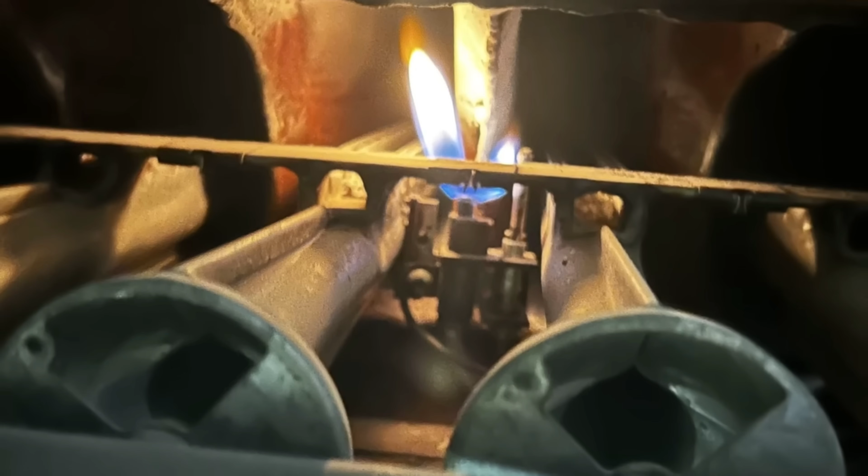Every winter, the same frustration returns. The heating bill rises, the furnace runs all night, and the house still feels cold by morning. In Newfoundland, a man named Eddie Roberts decided to challenge that cycle with a solution that cost less than $50.

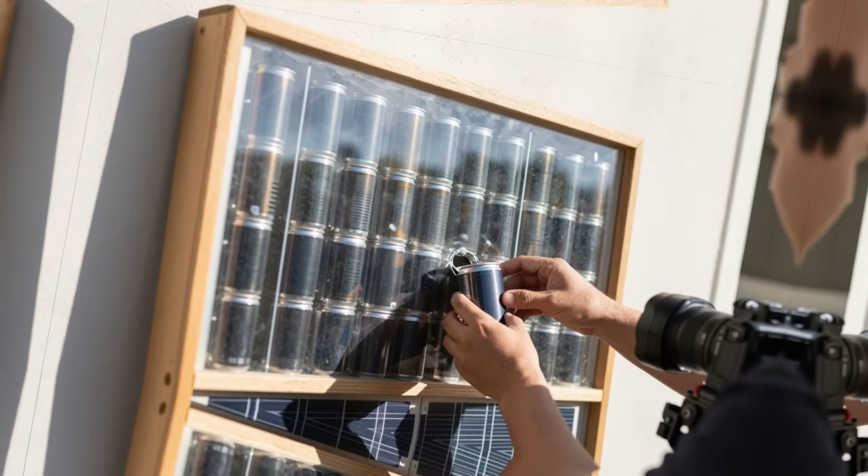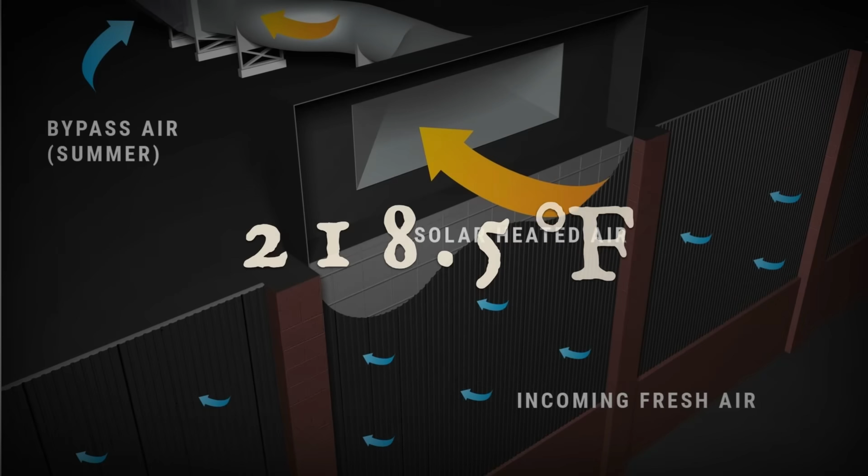Instead of relying on expensive equipment, he gathered 256 used aluminum beer cans, painted them flat black, arranged them in vertical columns inside a wooden frame, sealed the front with glass, and installed the unit on a south-facing wall. Then he measured the results. On a cold winter morning, the air entering the collector was 60 degrees Fahrenheit, but the air coming out reached 218.5 degrees. No electricity, no motor, no complicated machinery, and no monthly bill.

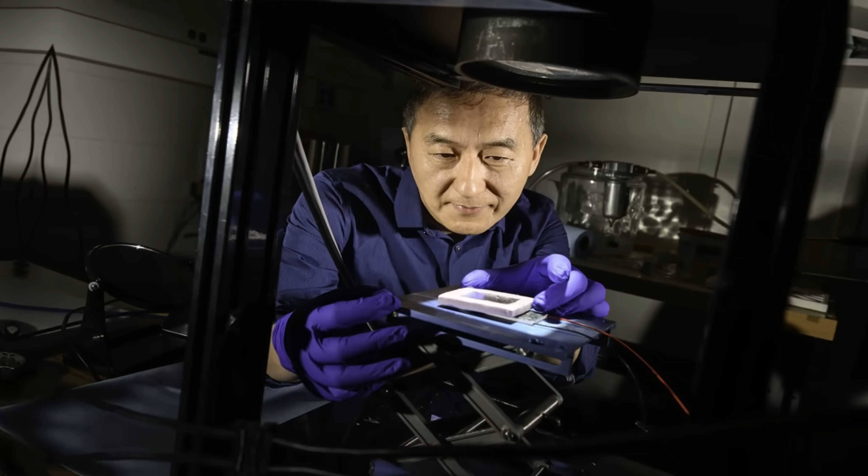It sounds unbelievable at first, but the real surprise is not that it worked. The surprise is that so few people know about it.

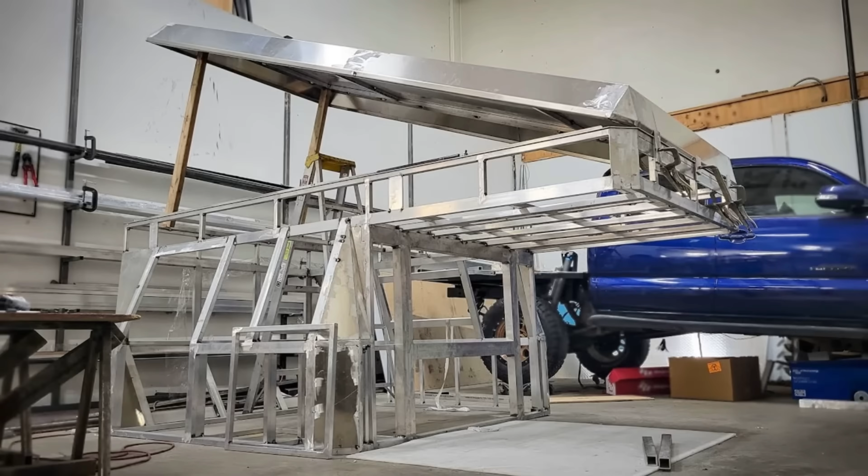Eddie Roberts was not alone. In the snow belt near Lake Michigan, another builder named Guy Sperry created his own solar air heater using 240 aluminum cans, a sheet of glazing, steel backing, and an aluminum frame. He built it himself over a single weekend.

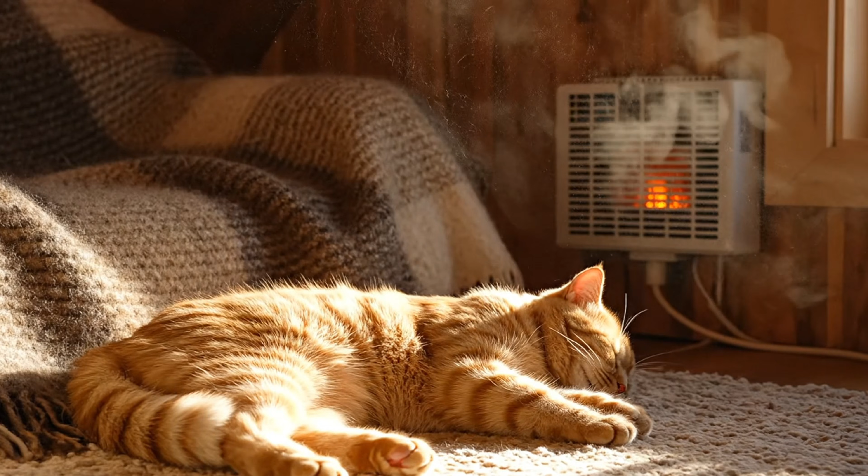Then winter arrived. On one of the coldest days of the year, with the outside temperature near 4 degrees Fahrenheit and icy wind sweeping across the lake, Sperry checked the temperature inside the collector. It had climbed to 172 degrees. His furnace did not run once that day, yet his small house stayed warm.

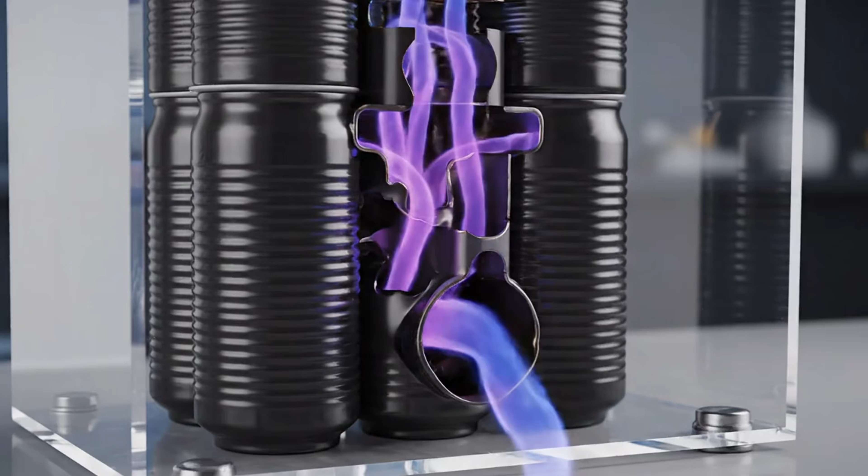This was not luck, and it was not fantasy. It was sunlight, recycled metal, and physics working together in plain sight. You can ignore a strange invention, but you cannot argue with measured heat. That is where this investigation truly begins today.

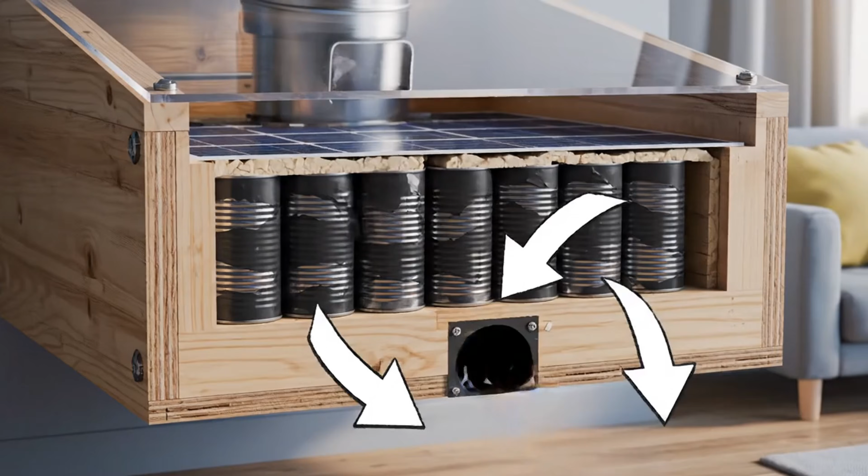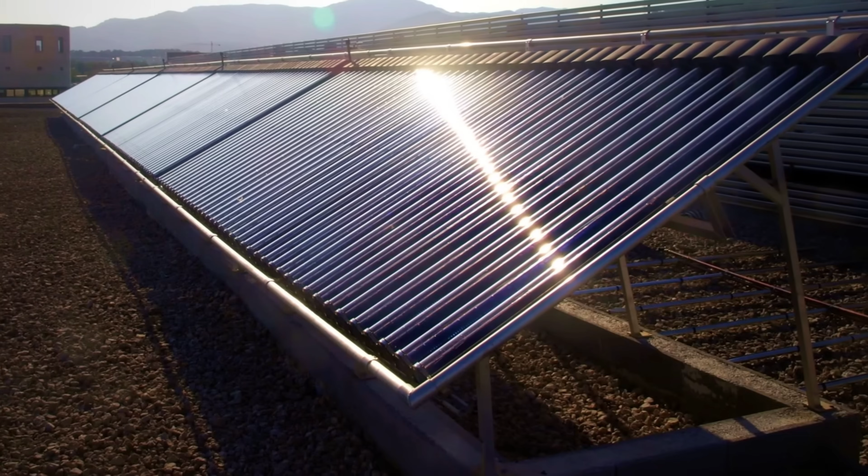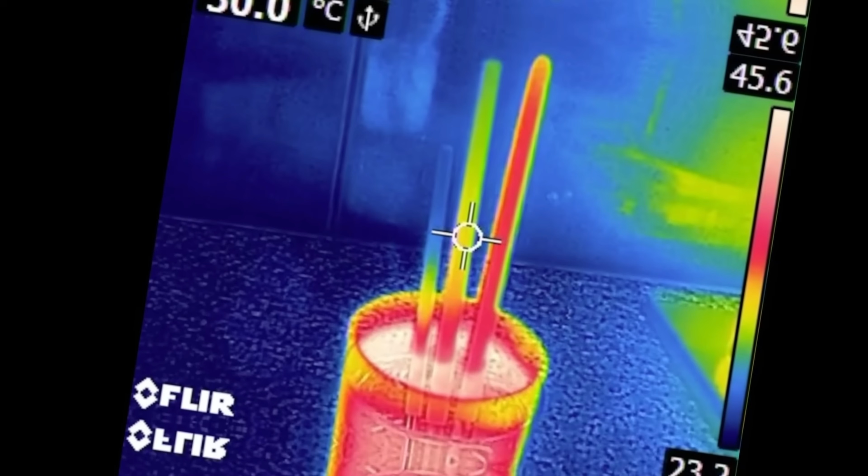So how can a simple box filled with painted aluminum cans produce that much heat? The answer is thermosiphon physics, a natural convection cycle that works without fans or electricity. Sunlight passes through the clear front glazing and strikes the black painted aluminum surface inside. Because black surfaces absorb radiation efficiently, the cans heat up quickly. Aluminum also transfers heat extremely fast, much faster than many other common building materials, so the warmth spreads through the can columns almost immediately.

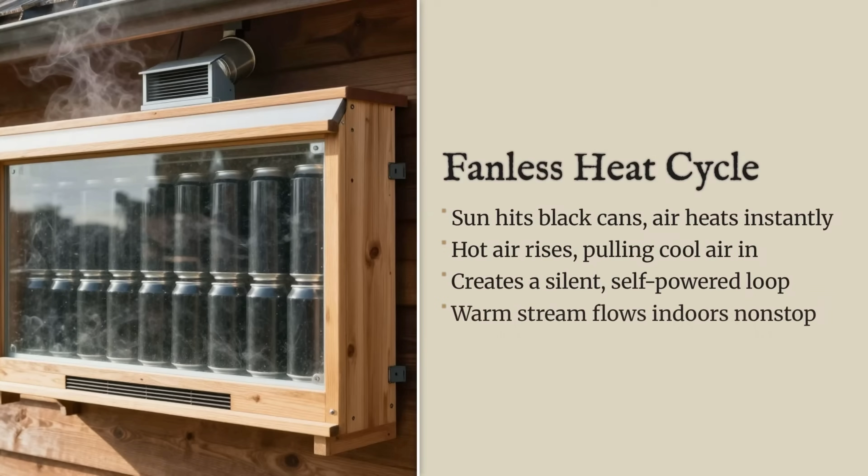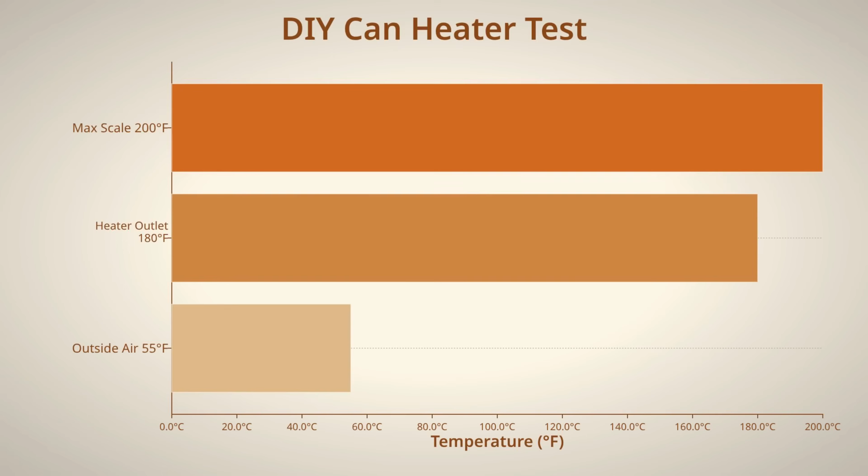As the air inside those columns heats up, it becomes lighter and begins to rise. That rising hot air exits through the top vent and flows into the room. At the same time, cooler and denser air from inside the house is drawn into the lower vent to replace it. Then the cycle repeats again and again as long as sunlight remains strong. In other words, the sun creates a continuous loop of moving warm air, turning discarded cans into a silent heater powered entirely by daylight.

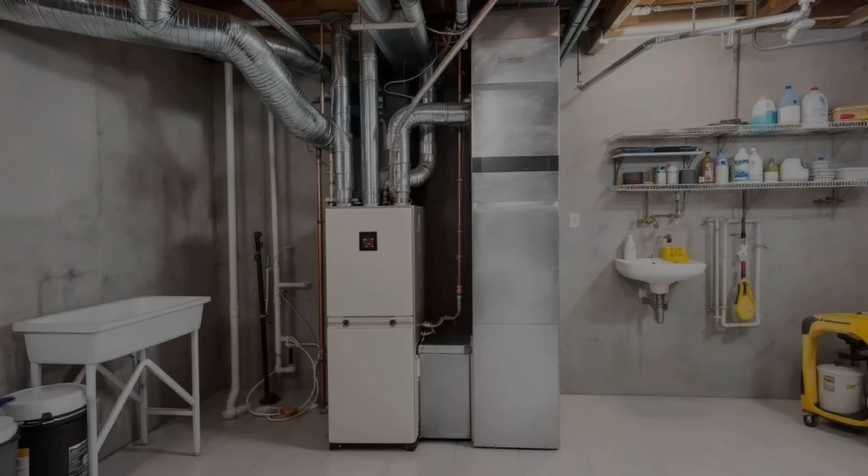Real-world tests make this system even more convincing because the results were not limited to one person or one location. In Oklahoma, a builder documented a homemade solar heater built with salvaged materials for about $70. At an outdoor temperature of 40 degrees Fahrenheit, the unit delivered air at around 150 degrees. When the outside temperature rose to 55 degrees, the output reached 180 degrees. Those numbers are impressive for a device with no moving parts and almost no operating cost.

Still, honesty matters here. This is not a magical replacement for a furnace, and serious builders do not pretend otherwise. On cloudy days, the output can fall dramatically, and under heavy overcast skies it may drop close to zero. But that limitation does not make the system useless.

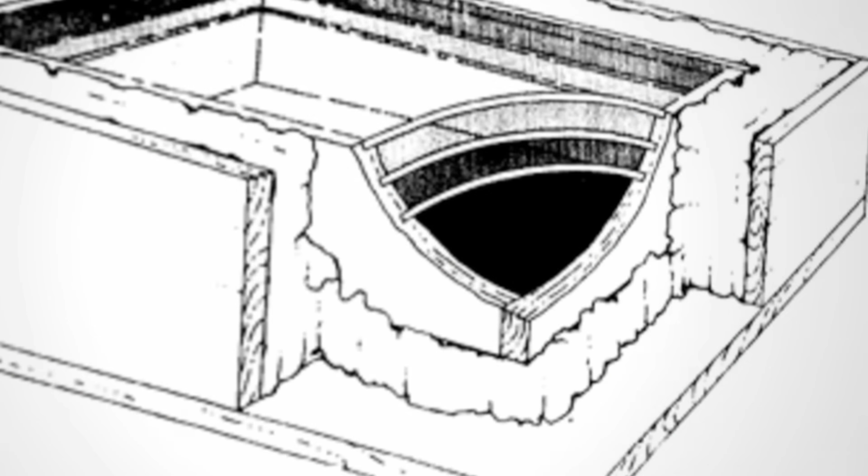It makes it realistic. A retired Boeing engineer named Gary Rea found that even after accounting for weather, his collector could still produce free heat equal to burning about 2 gallons of propane on a sunny day, paying for itself in less than a year.

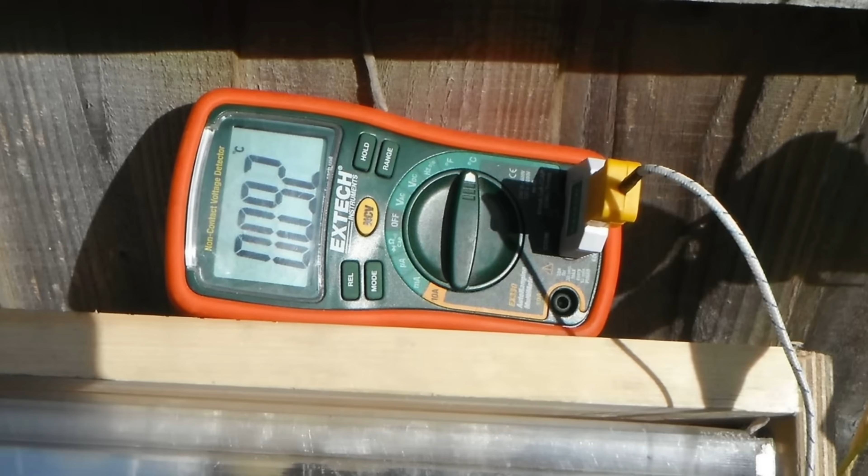What makes this story even more fascinating is that none of these ideas are truly new. Humans have understood the basic logic of solar heating for centuries, then repeatedly allowed it to fade from common use.

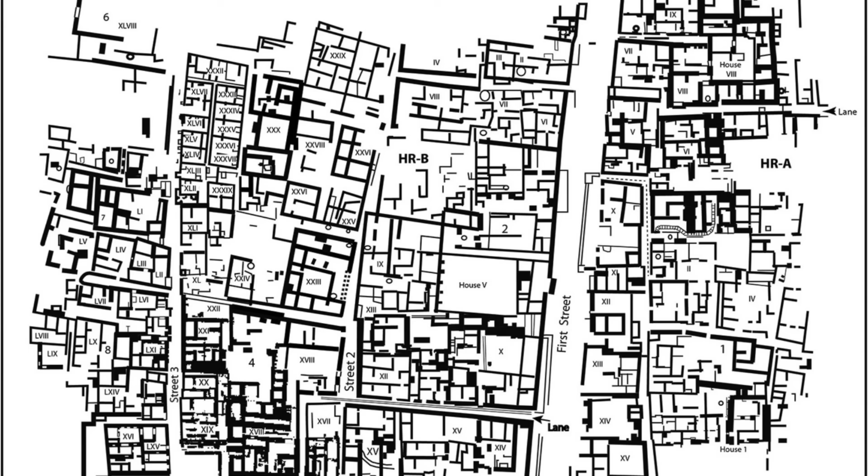In 1767, Swiss scientist Horace Benedict de Saussure built a simple insulated wooden box with a glass lid and a black interior. He called it a hot box. Under direct sunlight, the temperature inside rose to more than 230 degrees Fahrenheit, proving that solar radiation could create intense heat even when the surrounding air was cold.

But the principle goes back even further. In ancient Greece, entire cities were planned so homes could face south and capture the winter sun. Centuries later, the ancestral pueblos of Mesa Verde used cliff geometry, thick stone walls, and seasonal sun angles to hold warmth in winter and reduce heat in summer. These were not primitive accidents. They were intelligent designs based on careful observation of sunlight, shade, and thermal mass over time.

By the 20th century, solar heating was no longer just an ancient architectural instinct. It had become a serious scientific pursuit. In 1945, George Löf built one of the first modern solar air heating systems at his home in Boulder, Colorado, showing that captured sunlight could be directed into a living space in a controlled and practical way.

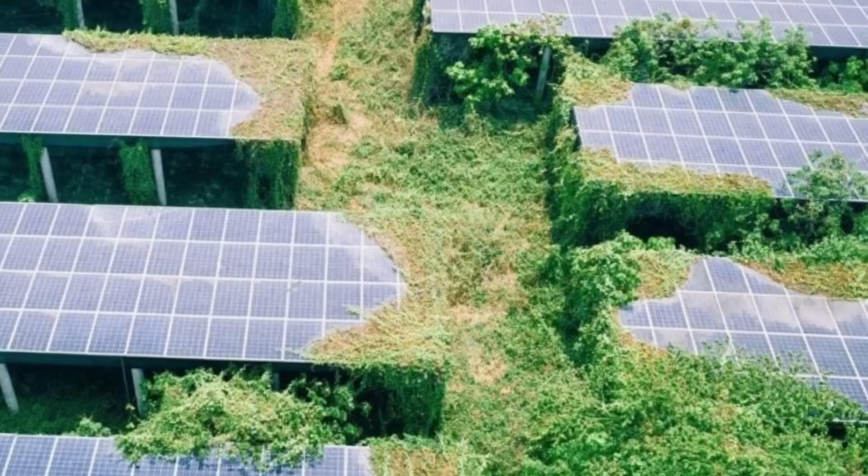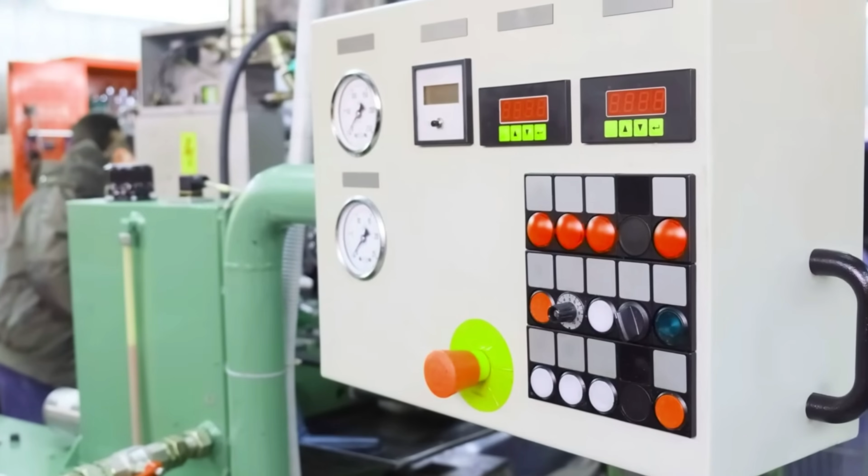Only a few years later, Maria Telkes pushed the idea even further. Working with architect Eleanor Raymond, she helped create the Dover Sun House in Massachusetts, a home designed to be heated entirely by solar energy. The system used flat plate collectors and thermal storage materials to hold warmth after sunset. Remarkably, it worked through multiple winters.

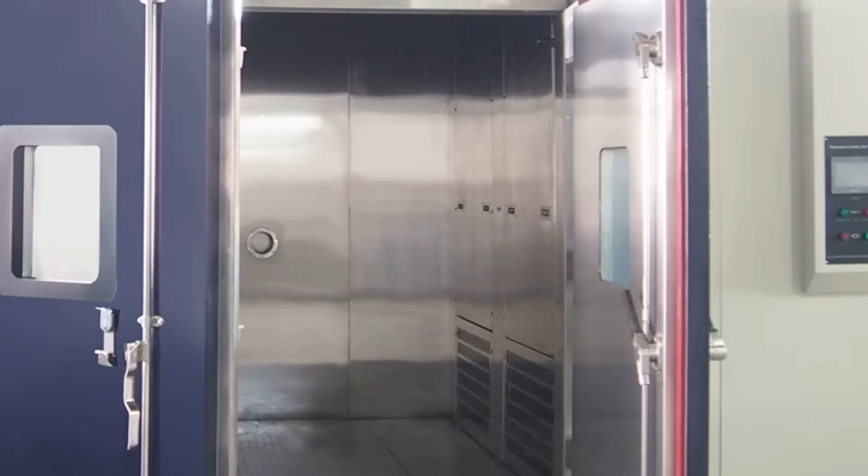Telkes was not an amateur experimenter, but a respected scientist with numerous patents and a record of life-saving inventions. Her work proved that solar heat was not a fantasy, not a niche curiosity, and not a symbolic gesture. It was a functioning technology capable of keeping real homes warm.

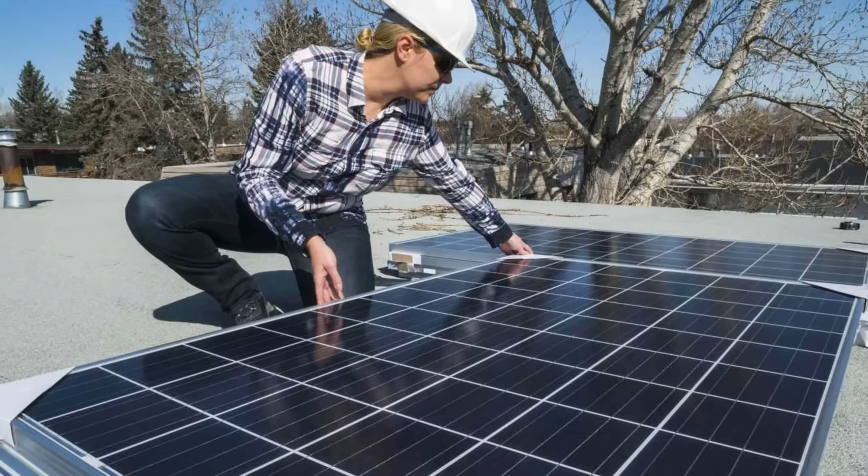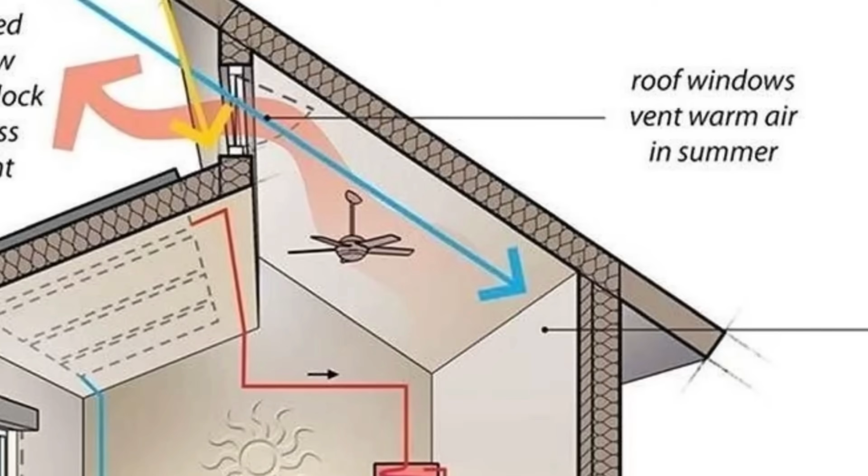The pattern then is not discovery. Discovery has happened again and again. The real pattern is abandonment. Each time solar heating proves itself, it gains attention for a moment, especially during periods of fuel scarcity or economic pressure. Then cheap, conventional energy returns, public interest fades, manufacturers disappear, and the knowledge is pushed back to the margins. That is why this story is larger than one homemade heater built from aluminum cans.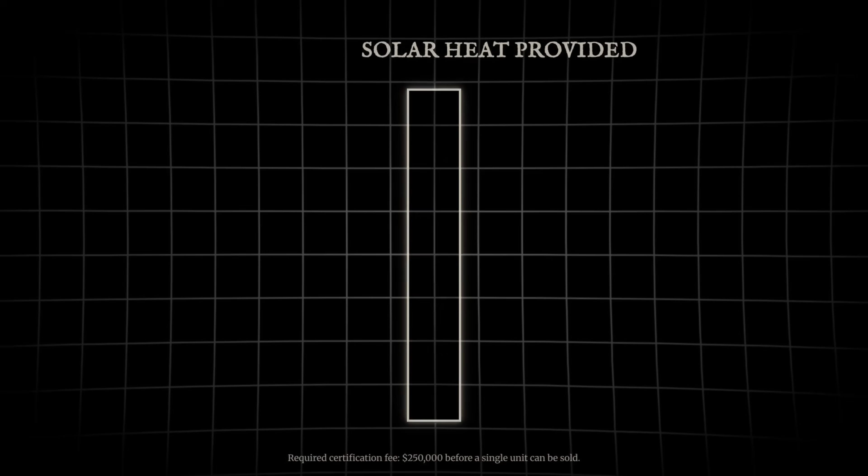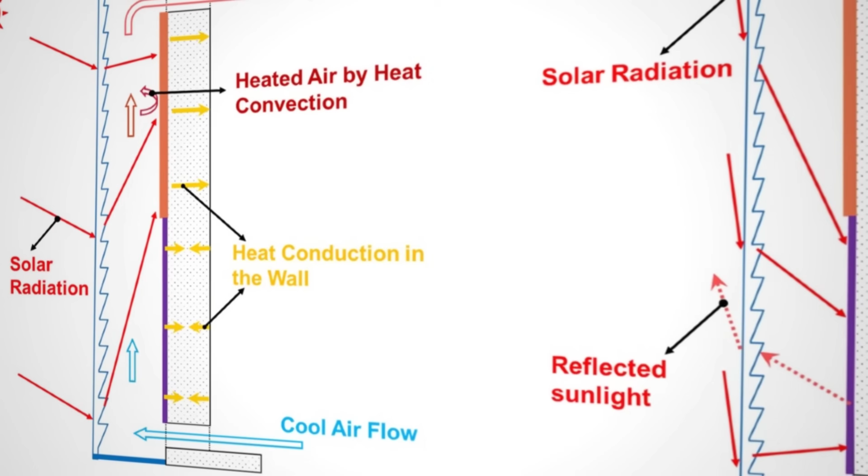The technology works. The history is real. The evidence stretches from ancient cities to 20th century laboratories to modern garages and workshops. What keeps these systems from spreading is not a failure of physics, but a failure of priorities. When a technology offers comfort without recurring fuel purchases, it does not fit neatly into industries built around monthly dependence, centralized control and billable consumption.

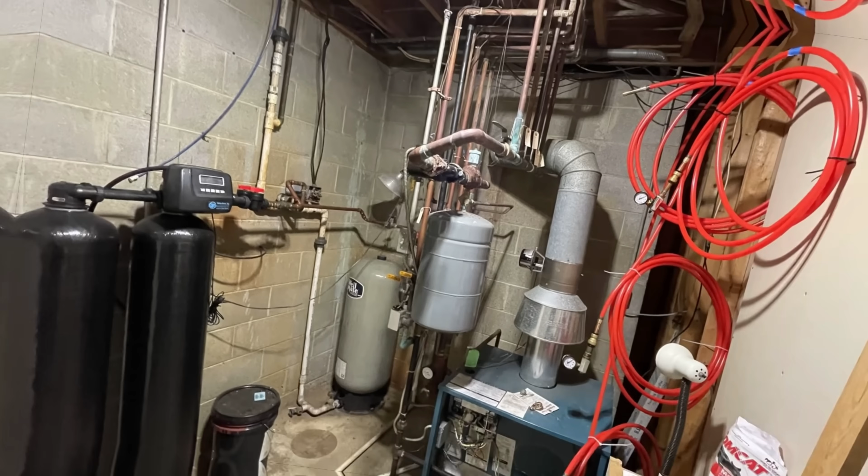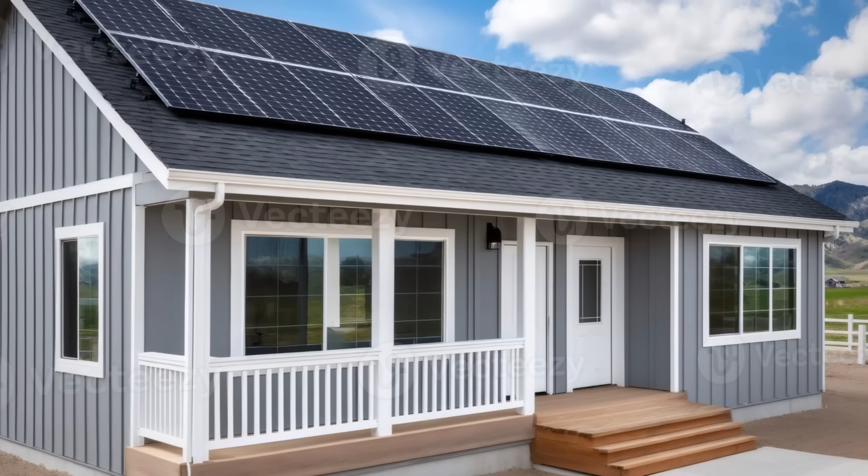That conflict becomes visible the moment a homemade heating system meets the modern regulatory world. In many places, any device considered heating equipment must be listed by a nationally recognized testing laboratory. That usually means formal certification through an organization such as UL or another approved body. On paper, this sounds reasonable. In practice, it creates a barrier that most small builders can never cross.

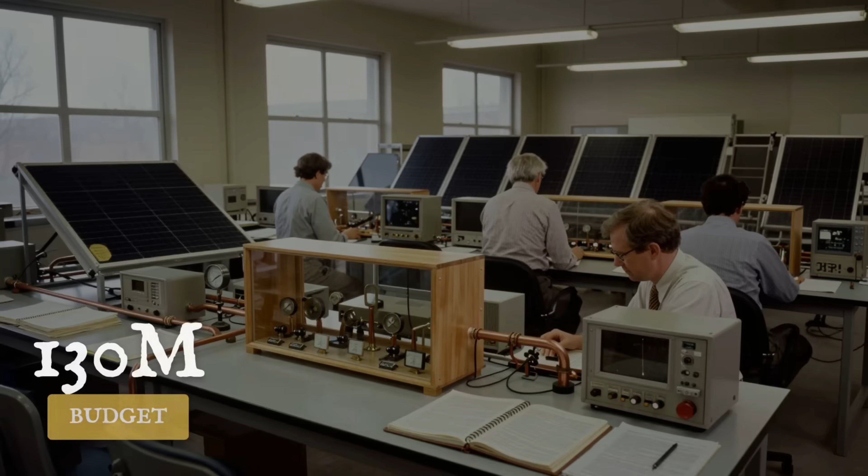A solar air heater made from recycled cans may cost only a few hundred dollars in materials, yet certification can cost tens of thousands more, far beyond the value of the product itself. The problem does not end there. Local codes may require permits for wall penetrations, inspections for installation, and insurance policies may refuse coverage for any non-listed equipment. None of this looks like an outright ban, but the result can feel almost identical.

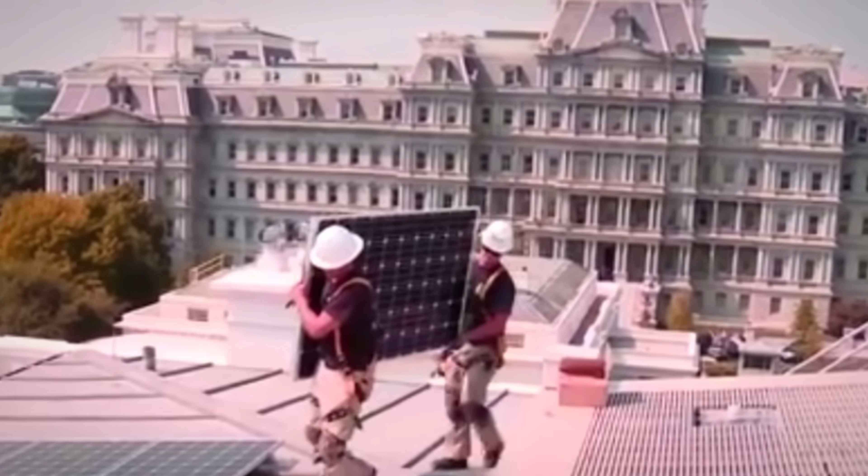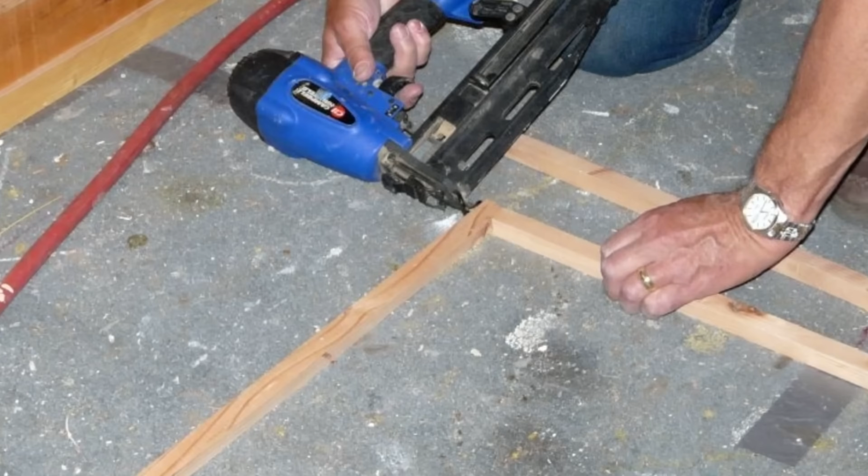The system is technically possible, physically safe when built correctly, and economically attractive, yet still pushed outside the legal and financial framework of ordinary housing. This is why so many practical solar heating ideas remain in garages, workshops, and internet forums. The issue is not simply whether they work, the issue is whether the system was ever designed to make room for low-cost self-built solutions. The obstacle goes beyond certification.

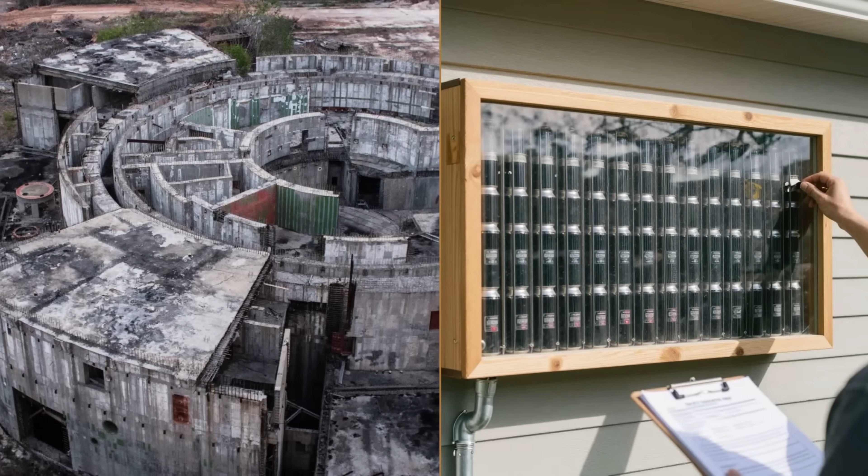In many communities, homeowners associations and local design rules can restrict even conventional solar installations, let alone experimental or self-built systems.

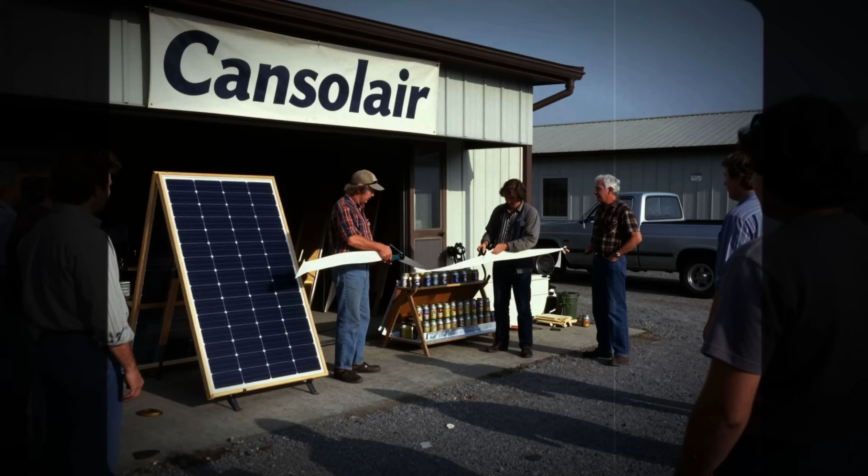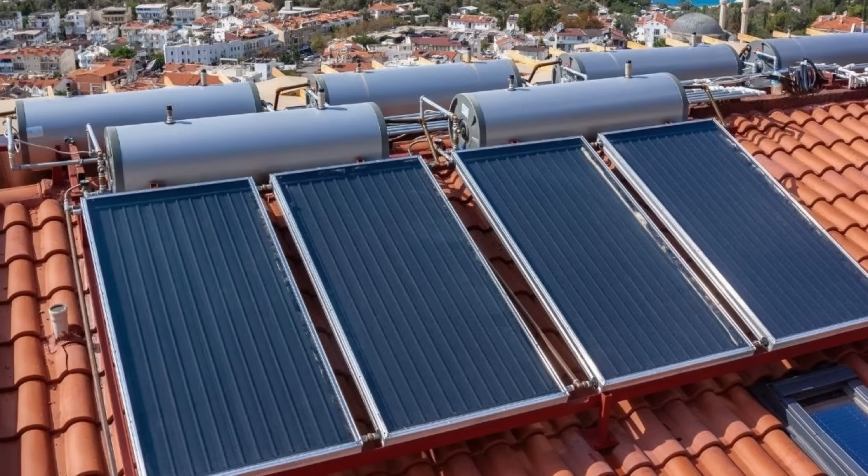That means a homeowner may have the technical ability to capture free heat from sunlight, yet still be blocked by paperwork, neighborhood covenants, or property rules written with appearance in mind rather than resilience or efficiency. And the soda can heater is only one example.

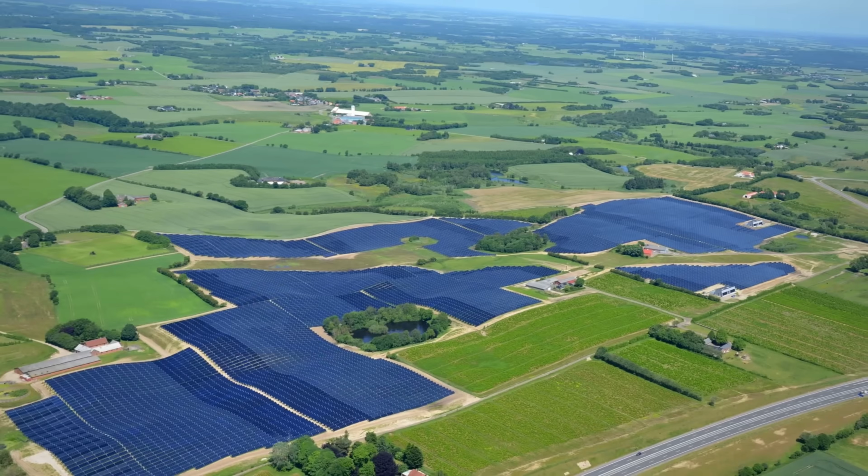Trombe walls, rocket mass heaters, earthships, and other low-cost energy-saving designs often face the same challenge. They are practical, proven in specific settings, and often remarkably efficient, yet they do not fit comfortably inside a regulatory culture built for standardized commercial products. A factory-made unit arrives with labels, manuals, and approved testing. A site-built solution arrives with craftsmanship, local adaptation, and evidence from the field. The first fits the system immediately. The second must fight for permission. That imbalance has shaped which ideas become normal and which are dismissed as fringe, even when the so-called fringe technologies can reduce fuel use, increase independence, and help ordinary households lower their energy burden.

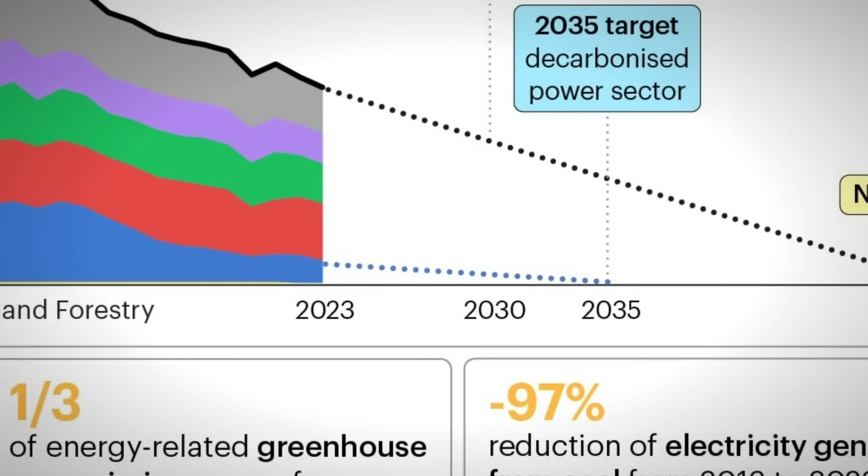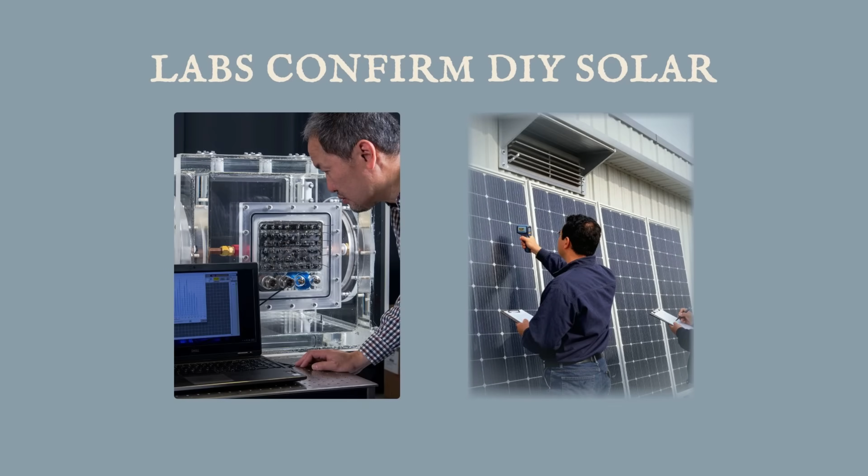Politics also shaped the rise and decline of solar heating in the modern era. During the energy crisis of the 1970s, interest in solar technology surged as fuel prices became unstable and national energy security turned into a public concern. The United States began investing more seriously in research, and solar energy briefly looked like part of the future. President Jimmy Carter even placed solar panels on the White House, turning them into a visible symbol of a different energy direction. But symbols can be reversed.

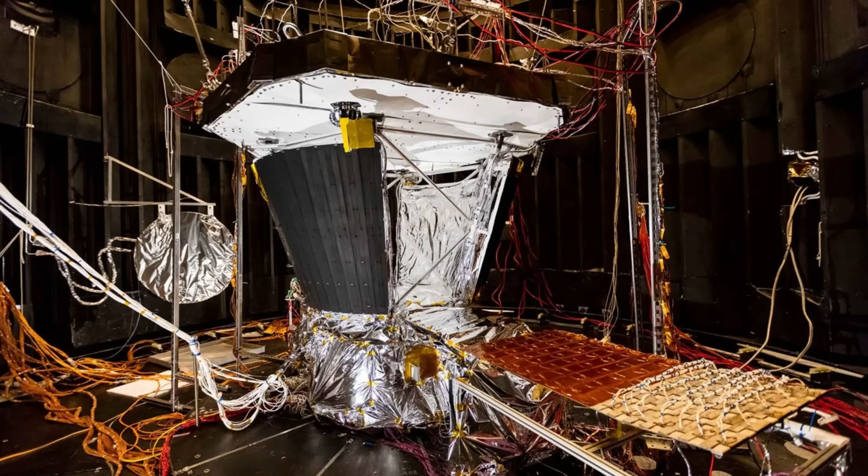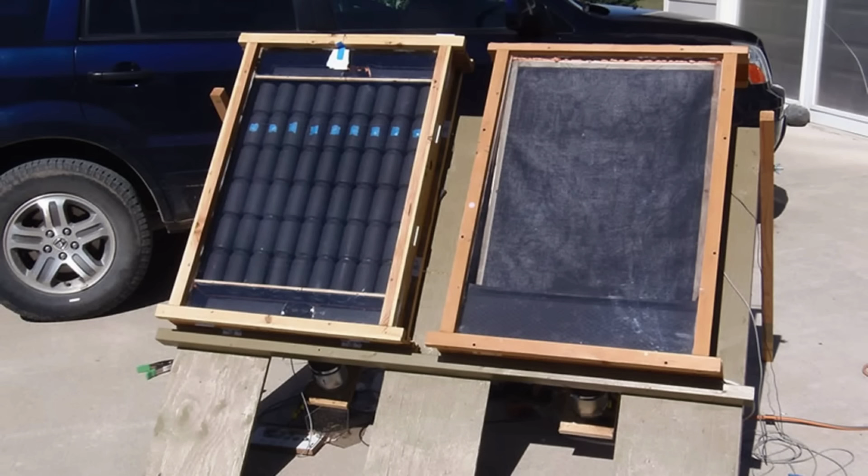In the 1980s, federal support was cut sharply, research budgets were reduced, and much of that early momentum collapsed. The removal of the White House panels under President Ronald Reagan became more than a practical decision. It represented a broader political retreat from renewable energy at the national level. Once again, the technology itself had not failed. What changed was the willingness of institutions to support it.

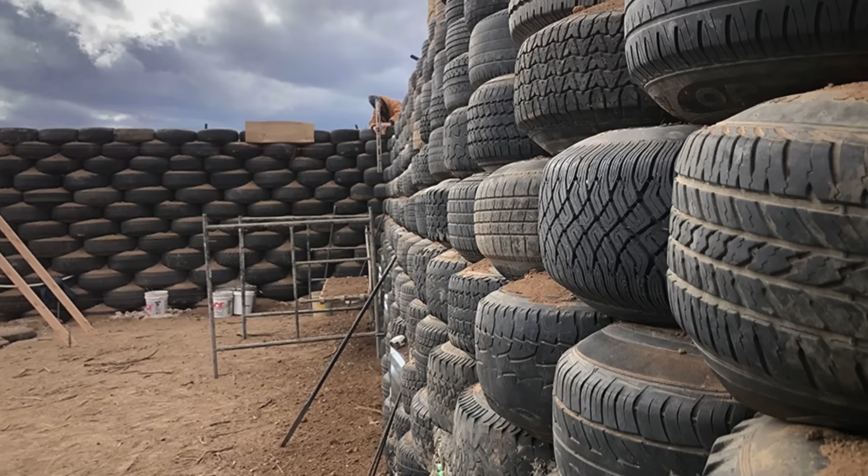What makes this even clearer is that other places chose a different path and achieved very different results. In Canada, commercial solar air heaters built from recycled aluminum cans showed that the concept could move beyond hobby projects into real products. In Denmark, solar district heating expanded on a massive scale, proving that even a country with limited sunshine could use solar thermal effectively when policy supported it. The difference was never just the amount of sunlight available. It was the willingness to treat solar heat as legitimate infrastructure.

Larger systems such as SolarWall were adopted in factories, military facilities, and industrial buildings across many countries, showing that solar air heating could serve both small homes and major institutions. At the same time, students and independent builders continued testing low-cost versions made from scrap materials, often producing meaningful amounts of heat with very small budgets.

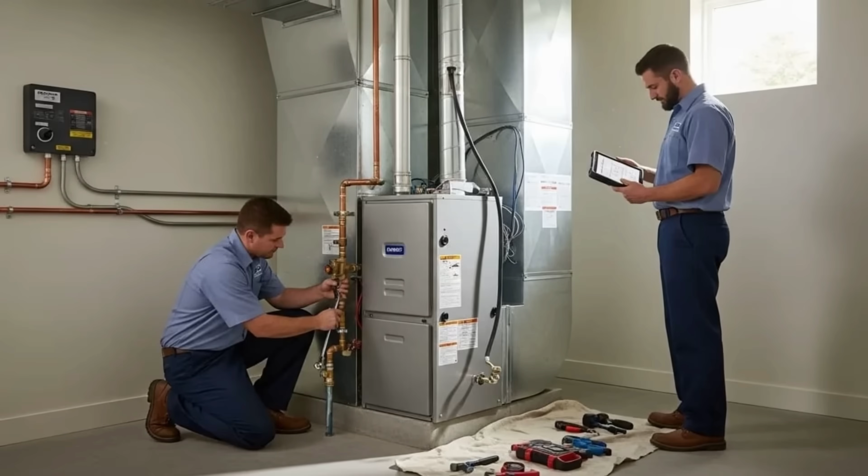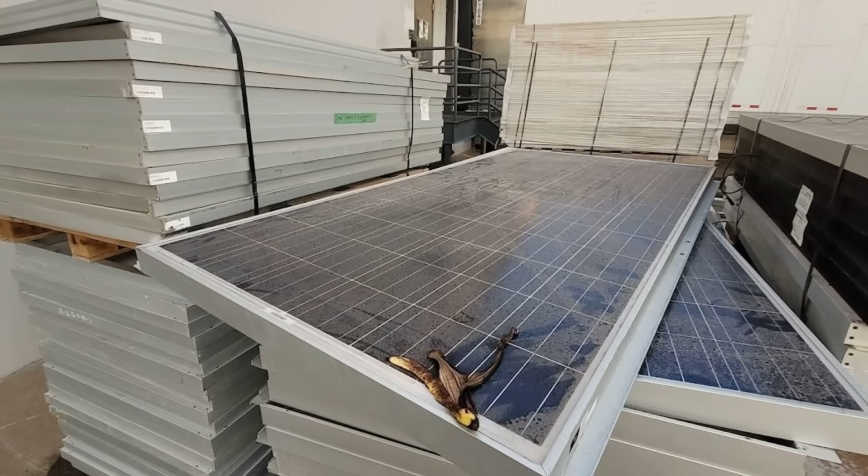All of this points to the same conclusion: the barrier is not the sun, the materials, or the physics. The barrier is whether a society chooses to encourage practical energy independence or quietly leave it on the margins. So the question is not whether a box of painted aluminum cans can make useful heat. It can, and that has been demonstrated in garages, workshops, laboratories, and full-sized homes for generations. The real question is why a family can fall behind on energy bills while solutions built from scrap, sunlight, and basic physics remain almost invisible.

A simple solar air heater will not solve every winter problem, and it will not replace every furnace, but it can reduce fuel use, lower costs, and give ordinary people one small measure of control over their own survival. That matters, especially in a world where energy debt keeps rising, while free sunlight still arrives every morning without a contract, a meter, or a subscription fee.

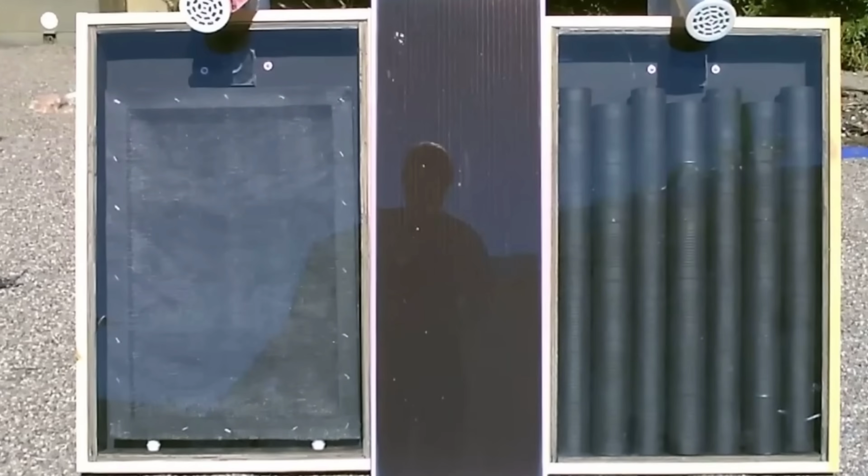200 discarded cans, a dark surface, a sheet of glazing, and one weekend of work may never fit the logic of a centralized industry. But they fit the logic of self-reliance. Build one carefully, test it honestly, document the results. Then show someone else, because once people remember that heat can come from sunlight and waste, they may start questioning how many other forgotten systems were buried simply because they made dependence less profitable.